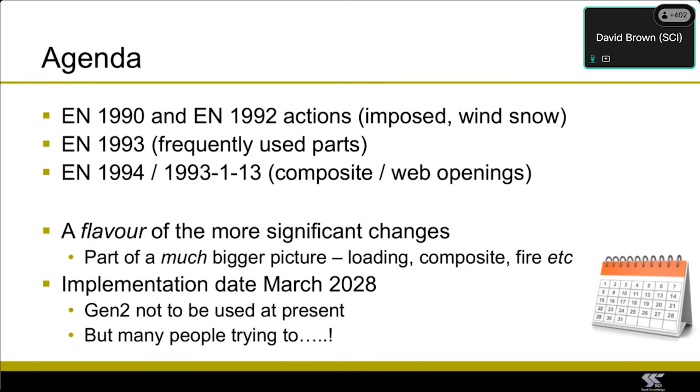In 2028 then, will people be using the Generation 2 Eurocodes? Will we change on one day from using Gen 1 to Gen 2? Well, probably not. Lots of people, certainly in the United Kingdom, remember we are governed by the building regulations. Although the building regulations currently cite the Generation 1 Eurocodes, there's no obligation to use them. So many people in the United Kingdom are still using BS 5950 and still using BS 449. The building regulations, well, they will need to be changed if they're going to cite the Generation 2 Eurocodes. And there are some questions about that, I think. So it's not entirely sure that they will be mentioned in the building regulations as of March 2028.

I want to emphasize, ladies and gentlemen, that this is a huge issue. It is a huge challenge. So many things are changing that will have a very broad impact. So in my rather limited world of the steel world, design resources, they will change. The references will change, the clauses will change, the values that you calculate will change, the procedures that you follow will change. And that means that everybody who prepares software, the software will have to be changed. And that won't be just the analysis and design of members. That will be lots of ancillary software. So the people who provide software to enable you to select a cold rolled purlin or a side rail or something like that. Many people use software to design composite beams. Well, that will all need some modification as well.

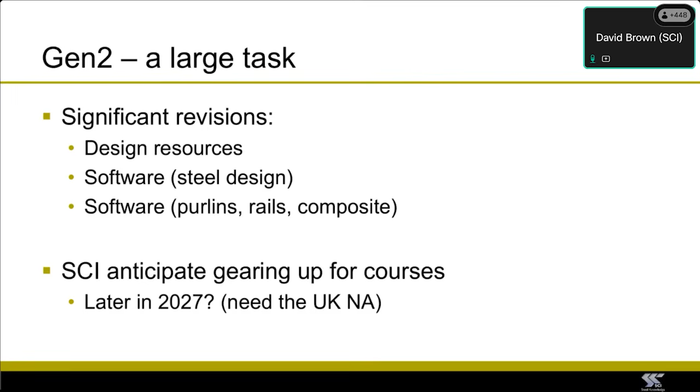So very much today is the start of a campaign, and you could imagine as we get nearer and nearer 2028, there will be a whole range of very detailed courses which the SCI will provide. So where are we 2 years in advance? Most of the Eurocode parts are complete, and very many have been published. Almost incredibly, there are now starting to be some early amendments. So even though in general the national annexes are not complete and not published, there are already some early amendments.

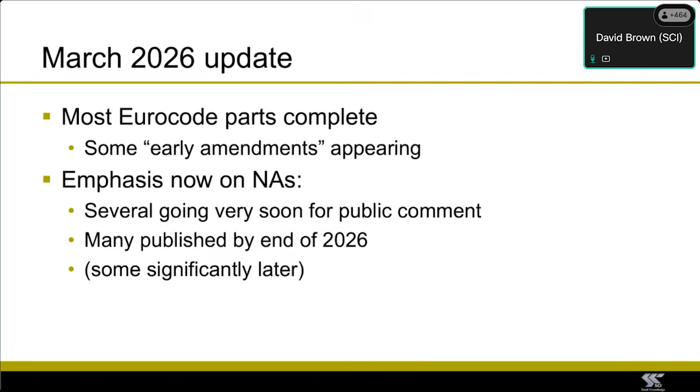The major work of completing the Eurocodes themselves is done, I would say, and now the focus is on the national annexes. So lots of people are very busy preparing the national annexes. Some have gone for public comment, you might have seen those.

Some are going for public comment, and I would expect a whole flurry of them later in the year. If we take a step back, these were the general Gen 2 ambitions. You can read those: make them easier to use, improve clarity, reduce the nationally determined parameters. So perhaps all those things have been achieved.

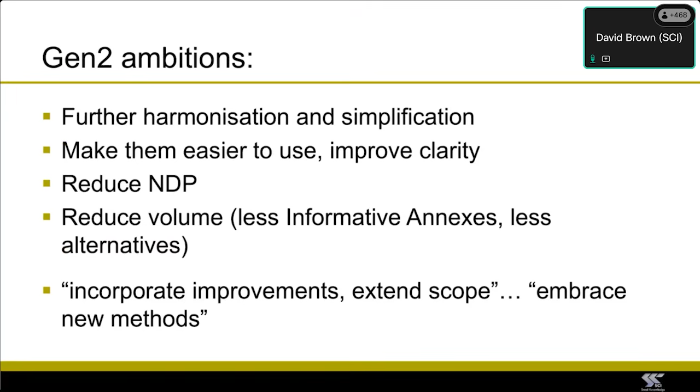I'm a little bit cynical. I'm not so sure. Because to make them shorter, I think what's happened is that some of the content has been put in annexes. So the core Eurocode might have fewer pages, but overall the page count might have in fact risen. I think many of the changes, and I will show some of these later on, are driven by academics who have spent quite a lot of time looking in detail at the application of the code clauses, and perhaps they've identified where something could be improved a little bit, or perhaps where something could be made safer if they thought it was a little bit unconservative.

So lots of people have been doing lots of research, and that means perhaps that the clauses are driven by that research. They're perhaps not as pragmatic or as simple and conservative as our history of code writing here in the United Kingdom. Lots and lots of people have been doing very many finite element analyses, looking at the results from those, and then some of the clauses you'll see are clearly curve fitting to the results. I'll show you some examples of that later on.

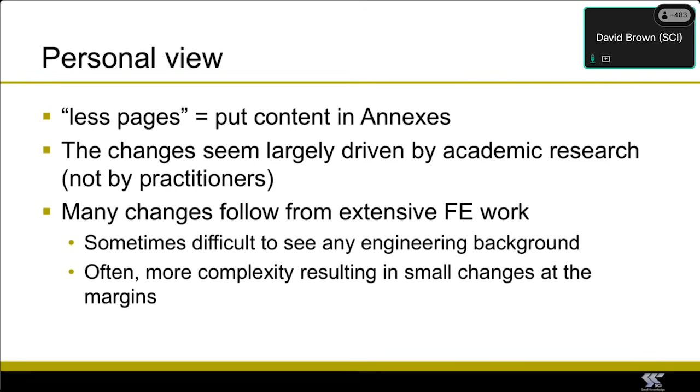We've got crazy formulas with indices or powers to 3 decimal places. It's difficult to see the mechanical background to that. Clearly they have been developed because of lots and lots of finite element analyses.

So the code clauses that I know and love, for example 6.61 and 6.62 and 6.10, 6.10a and 6.10b, well, I'll have to revise my little brain cells because they will all be renumbered. Generally there are fewer nationally determined parameters, so maybe that's good.

Some of the content that we are familiar with has been lost. One particular thing for us in the United Kingdom is that we analyze our portal frames plastically, and therefore we want to consider the stable lengths next to a plastic hinge. Well, it was decided that really that was a UK-centric interest, so that has been lost. Don't worry, ladies and gentlemen, because it will appear in due course in a revised SCI publication, because that sort of guidance is essential for us in the UK.

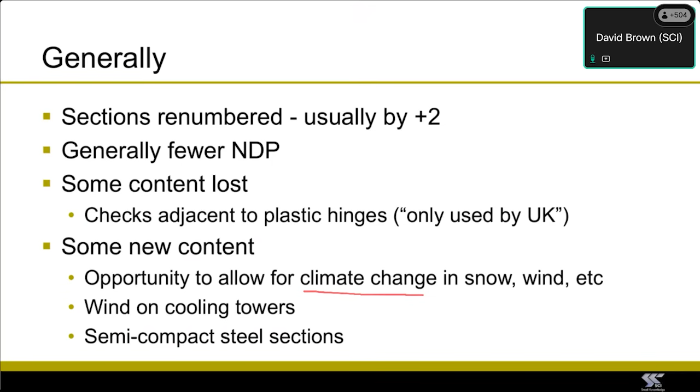I was interested to see that 1991-1-4, so that's the wind code, has got wind on cooling towers. In my experience in the United Kingdom, we've been getting rid of cooling towers, so to add that in seems a rather strange sort of feature. And finally, one uniquely to the steel world, the additional resistance that we can get by a clever trick with semi-compact sections, and I'll show you that a little bit later on.

So here is 1990. This would be where we would get our combination of design actions from.

So some modest changes. Thankfully, I'm not involved with geotechnical design because there's an awful lot of additional information in 1990 relating to geotechnics. So for people doing foundations, that will be a key Eurocode for you.

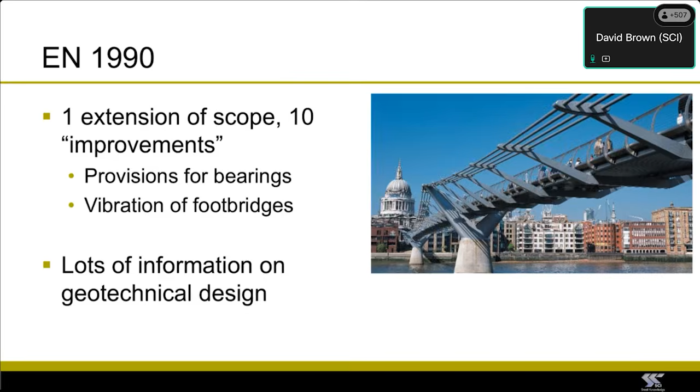The expressions I'm generally interested in are to develop the design combinations of actions. I would know those as 610, or the option of 610A and 610B, and you get a slightly better answer at lower load out of the combination of 610A and 610B. Well, those numbers have been changed, so now it's 812, and then the most onerous of two expressions in 813. So it isn't 813A and 813B anymore.

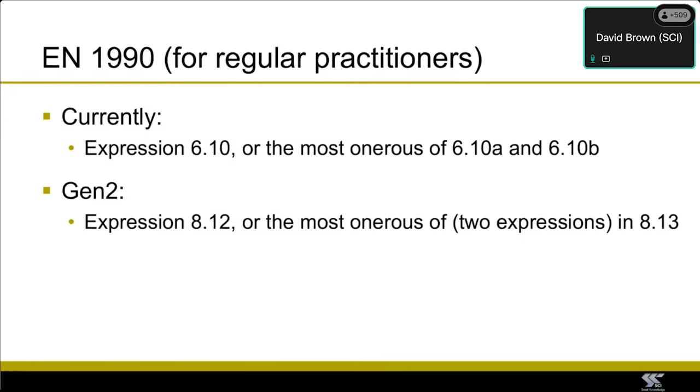It's two expressions, but they're all within 813. And to me that's become really silly, because when you refer to either one of those expressions, instead of calling them 813A and 813B, crazy in my humble opinion, they refer to the upper part of 813 and the lower part of 813. Maybe those are the rules, but to me, 813A and 813B would have been the way to go.

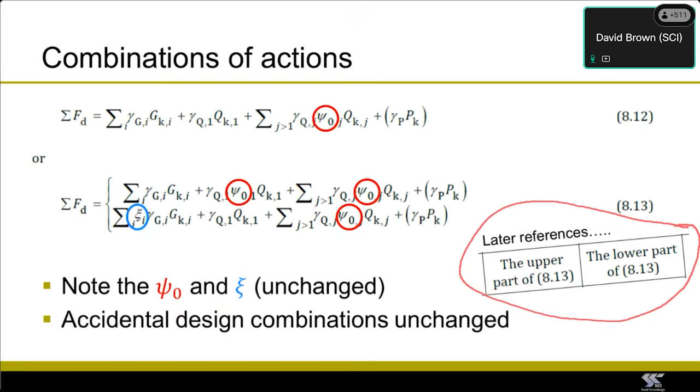As you look at the formulas, you will probably recognize that they're exactly the same as 610A and 610B, and the top one is exactly the same as 610, so no change there. And the values we will use - well, there is no United Kingdom national annex yet, but I would expect that we will take the recommended values, so the values we are familiar with: 1.35, 1.5, and 0.85.

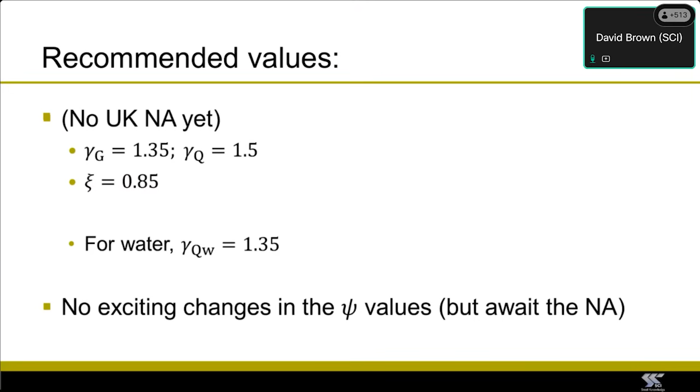There is a table of the psi values. So in the combinations we use psi 0, psi 1, and psi 2. Those remain a nationally determined parameter, and there is no national annex yet to EN 1990, so I can't comment on those. We made one or two changes in the current national annex, and therefore I would expect one or two changes in the Generation 2 national annex.

So I've moved on to 1991. We would get imposed loads on floors and on roofs from 1991-11. Another thing we used to get from EN 1991-11 was the impact loads on car park structures. Sadly, that's no longer in 1991-11. That should have been moved into 1991-17, which is all about accidental actions, you'll recall. Sadly, it's not there either.

The UK used that annex extensively, and therefore the national annex to 1991-17 is going to import what we would have known as Annex B in the current version of 1991-11. So that would be the familiar impacts on, for example, columns in car parks.

The UK National Annex is likely to have lots and lots of subdivisions for imposed floor loads, just as it does now. So we await the publication of that National Annex. There is a general observation that the appropriate floor load for a general office should be a total of 3 kilonewtons a square metre. That would include an allowance for movable partitions. So whichever way you cut it, the total should be about 3 is the recommendation. I'm not sure whether people will observe that recommendation.

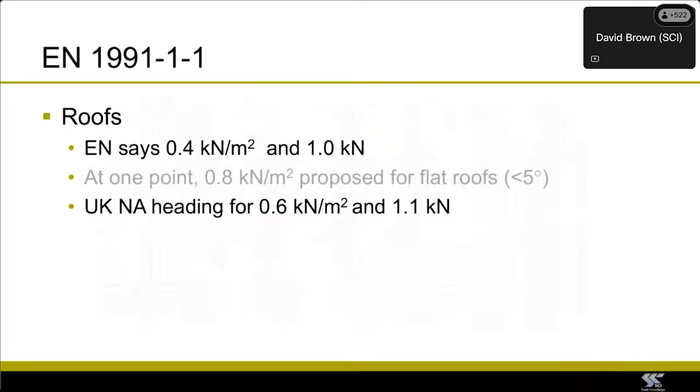This is the wind code, 1991-14, which has not been published yet, so I only have access to a preliminary version.

What I've done on this slide is look at the PDF of that preliminary version. I've made each page very small, and this particular version is coloured yellow where there is a change, just to give you an idea of the amount of change in 1991-14. It is very considerable in the core Eurocode. Those of you who know 1991-14 will know that the UK National Annex is a very substantial document and makes significant changes. I would expect that to be exactly the same with 1991-14 Gen 2.

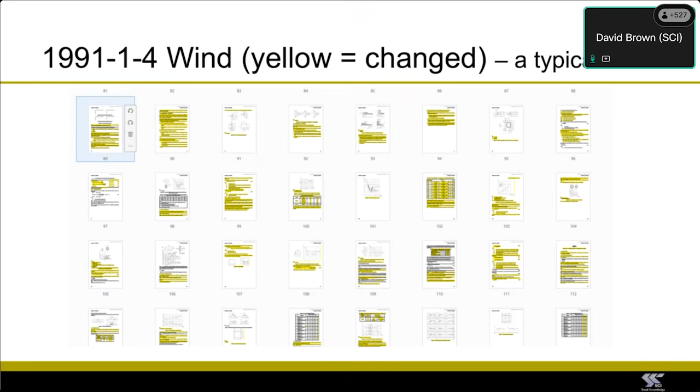So this slide is saying that the core Eurocode is changing quite a lot. I still expect the UK National Annex to have even further changes. I'm unable at this point to say anything more about the wind code, but I can say a few more things about the snow code.

So there is some drama here. We are used to a uniform snow case, and then we are used to a whole range of accidental cases: snow in a valley, snow behind a parapet, snow blowing off a tall roof onto a lower roof. In those accidental situations, we take the partial factor as 1.0.

In future, there will be no accidental actions due to snow. So the valley condition, the snow behind a parapet, and the snow blown off a high roof onto a lower roof, they will all be persistent cases, and they will attract the partial factors, for example for a variable action of 1.5. So quite significant changes in this area.

You would immediately think that will be a very onerous penalty if the valley condition and the parapet condition become a persistent load case. Well, they are relatively onerous, but the coefficients which define the depth of the drift, for example, are all reducing. So maybe it's not as bad as you first think, but it will be quite a significant change, and I think many people will say the overall load will be increasing. So you kind of lose a bit applying the 1.5 factor, and gain a bit because the coefficients are perhaps not as severe as they currently are.

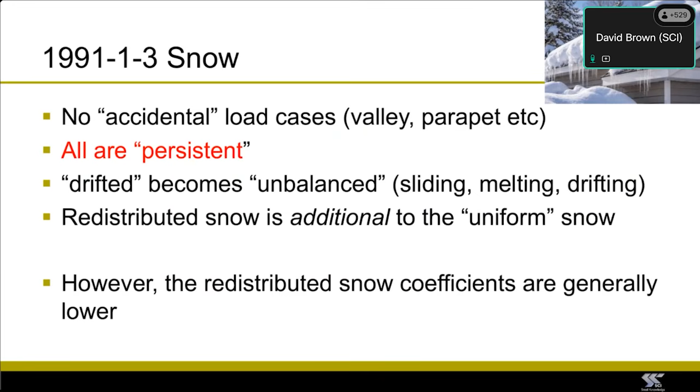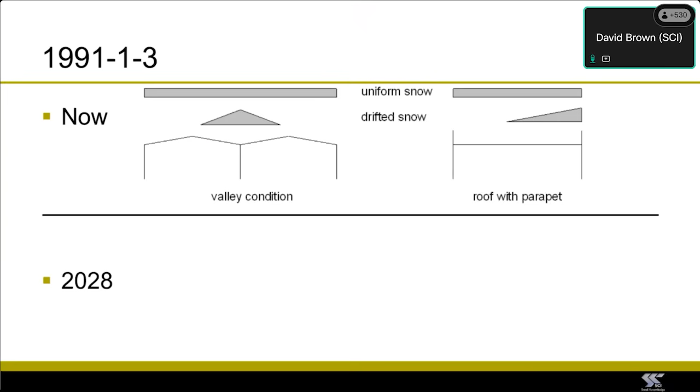So the top of this slide is what we normally do. We have a uniform case, which is a persistent case and attracts the partial factor for variable actions of 1.5. Entirely separately, we have accidental cases of snow in the valley or snow behind a parapet, using a partial factor of 1.0 because it's an accidental case. Well, in 2028, it will not be like that.

You will also notice in the drifted cases, now called redistributed cases, that the redistributed snow is additional to the uniform snow. So perhaps on the right-hand side here, what we might have imagined is a drift that's redistributed and additional to the uniform snow, and the same thing in the valley case. So probably we might be a little gloomy about those changes.

They will certainly have an impact on steelwork, and might well have an impact on secondary steelwork. The only bright note is that the value of the summation of the uniform snow and the redistributed snow in this location, or in the middle of the valley, is generally less than the accidental case we were previously aware of. So maybe it won't have such an impact on secondary steelwork, but I believe it will have an impact on the primary steelwork. We need to be careful with that.

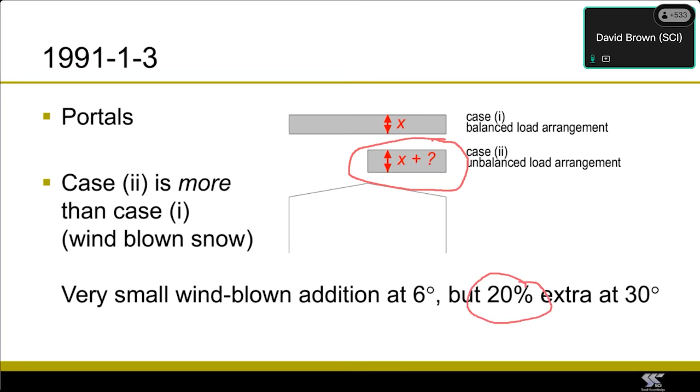But for other forms of structure, that additional snow on the one roof slope could be quite significant - 20% extra wind-blown snow at roof slopes of 30 degrees. So something to take care of.

So that was a bit of a trawl through 1990 and 1991, the interesting bits.

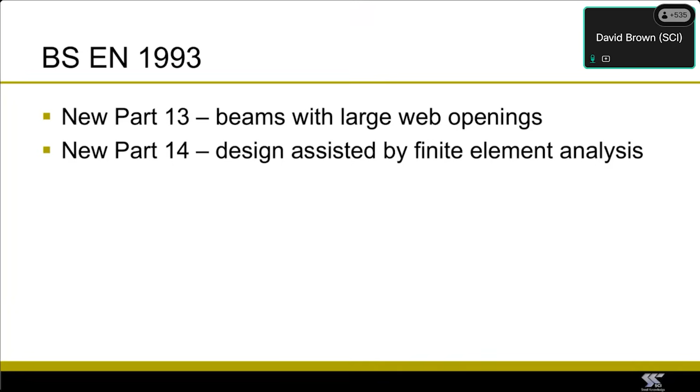Anyway, we're moving on to the Steel Code 1993. There are two new parts: beams with large web openings, which fortunately follows previous guidance the SCI has published, though with some modest changes, so software and design routines will have to change. And a brand new part, Part 14, design assisted by FE analysis. Loads of people are using FE these days, so it's probably right that there is some guidance available, and there it is in Part 14.

Gen 1 was 96 pages, Gen 2 is 120 pages. So, well, it's become larger rather than smaller.

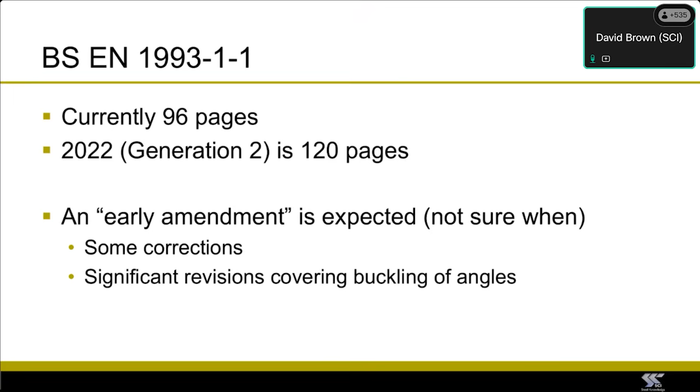It is published, it's been published for some time. We expect an early amendment. I don't believe the early amendment has yet been published, but we expect it, and we're looking forward to changes in the buckling of angles.

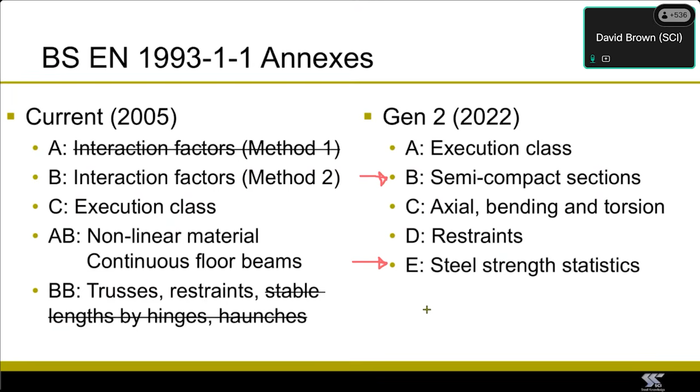And if you're very good, you would be able to calibrate your partial factors against those steel strength statistics. So that might be useful for researchers in particular.

There's a whole range of different types of analysis now in 1993-1-1. They have always been there, but they perhaps haven't been developed as much as they are in Generation 2. So if members are really chunky and therefore imperfections don't have any significant impact, and if frames are really stiff and second order effects in frames don't have any second order impact, well, we don't then have to worry about imperfections, and we don't have to worry about second order effects. It seems a bit stupid to say that, but that's the truth.

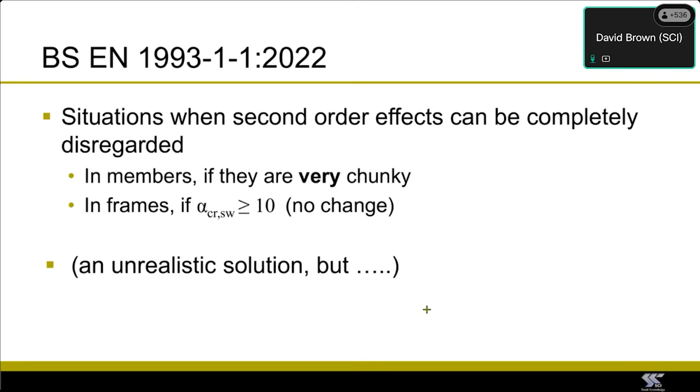If we did have something where we didn't need to worry about imperfections and didn't need to worry about second order effects, I think it would be an entirely unrealistic solution. It would be very, very large members for the sorts of loads that we're trying to carry.

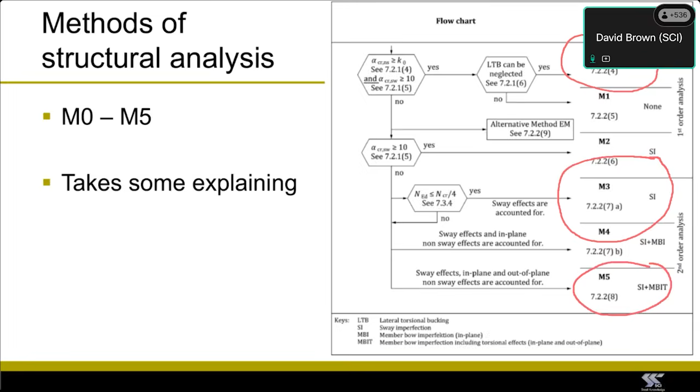Yes, we have to concern ourselves with imperfections, and yes, we have to allow for second order effects in our analyses. And somewhere down at the bottom, if we allow for absolutely everything in the analysis - imperfections and second order effects - well then all we need to do after that is check the cross section. So that will be one extreme.

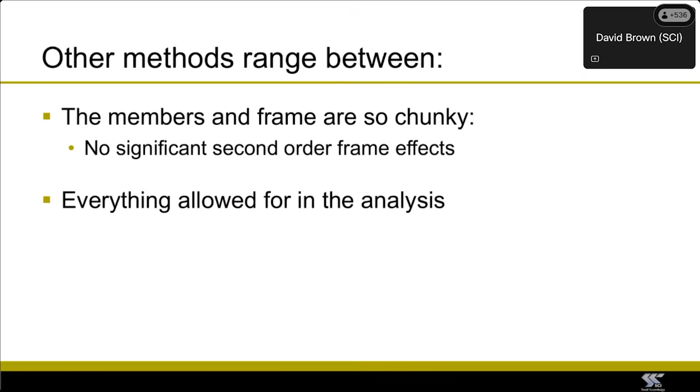Members are so chunky and so stiff that we don't need to worry about second order effects and imperfections. And at the other end of the extreme, we would allow for everything within the analysis, and then all we need to do is a cross-sectional check. So probably I suspect that we will remain generally where we are normally.

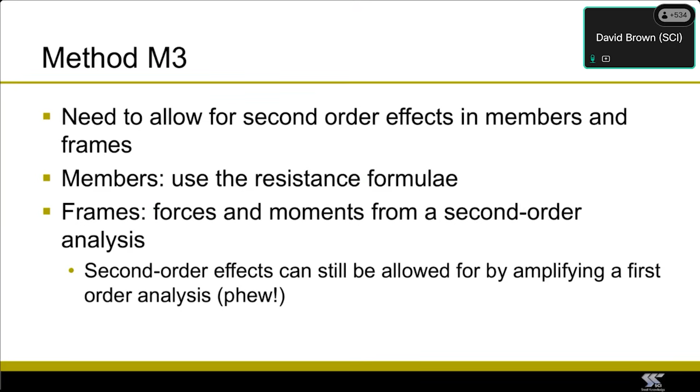We will relax about member imperfections because we know that they're allowed for in the code clauses. They always have been and they always will be. And for frames, we will check frame stability and calculate alpha, currently known as alpha crit, and if necessary do an amplifier. The alternative is that we do a second order analysis of the frames. So really no change, but I think that flowchart will cause a lot of confusion when people get to it.

If you're a researcher, instead of relaxing and knowing that imperfections are covered in the resistance formulas, you could model your members with initial imperfections. I don't know why anybody would want to do that unless you are a researcher, but here you can, and here we have some new values. I share a twinge of amusement that somebody has spent a lot of time and worked out very precise values, 1/68, not 1/70 or 1/65, but 1/68. So somebody somewhere will be very proud of their work in calculating 1/68.

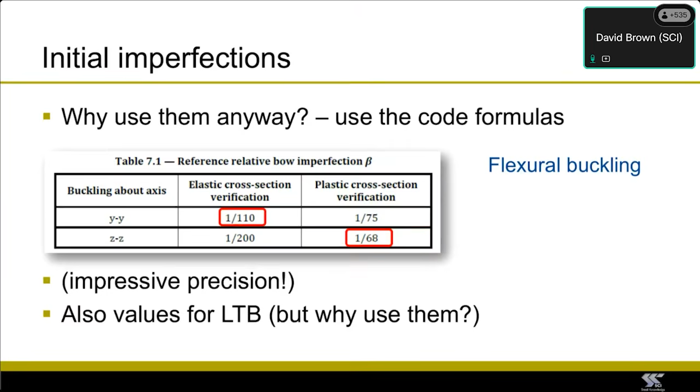This is classification. The areas highlighted are where classification changes have been made, and these changes are always more conservative. In some cases, when you classify a member to the Generation 2 Eurocodes, it's in a higher class. It might have been class 2, and now you might find it in class 3. Of course, that's a worse situation in terms of resistance, because as you go from class 1 to 2 to 3 to 4, the resistance is diminishing.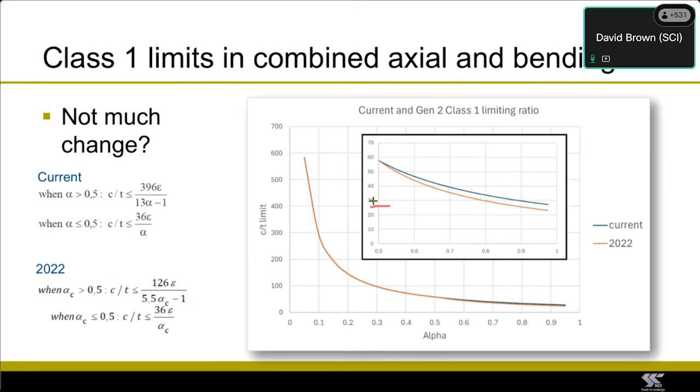I am being a bit cynical here with this graph. These are the classification limits plotted for when you change from class 1 to class 2. I'm being cynical because at this scale on the right-hand side of the curve, you can't really see any difference. If you enlarge that right-hand side from alpha greater than 0.5, you would see a small difference there. But remember, you're reading across to this value on the left-hand side, so it might now be 28, and maybe the value before was 30 or something - a little bit of change in that sort of area.

This is the class 3 limit, and again I'm plotting the entirety there - psi value on the bottom scale from -1 to +1. You can see the Generation 2 curve, which is dotted, has a very slightly different curve. And again, it makes you wonder, well, was it worthwhile? Did it make so much difference? Are we so clear about the modeling of our loads, and so clear about the modeling of our structure, that we really believe the bending moments, shears, and axials are precisely correct, sufficient that this change makes sense?

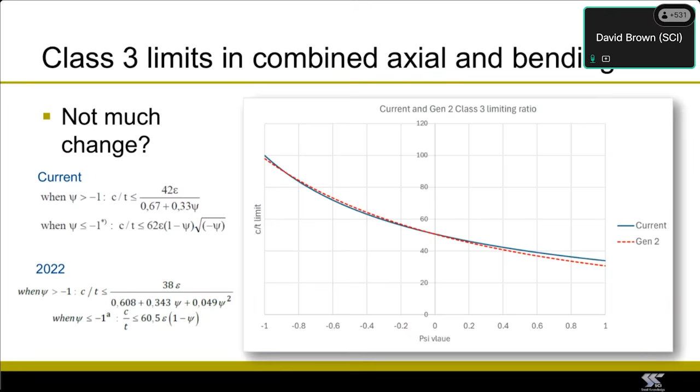Sometimes I think we need to remember that we're just modeling the loads. We don't really know what the loads look like - we model them as UDLs or point loads, but they're not really like that. And our frame analysis, well, again, that's a model of reality. Rather profound, really, for a Wednesday, but here we go.

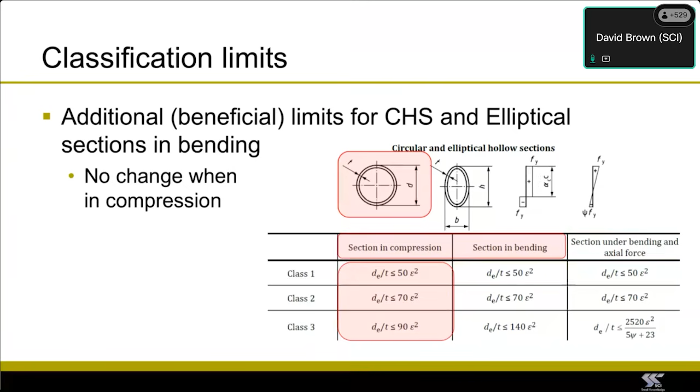Now, this is an introduction to the work which has gone into Annex B with semi-compact sections. This is a moment rotation curve - moment on the box... no, rubbish.

Moment on the vertical axis and rotation on the horizontal axis. This is how beams behave.

Class 1, we get past the plastic moment of resistance because of strain hardening, and we can rotate it a long way. Class 2, we equally get past the plastic moment of resistance, but we can't rotate it very far. Class 3, we're less than class 2, and therefore we generally limit ourselves to the elastic moment of resistance.

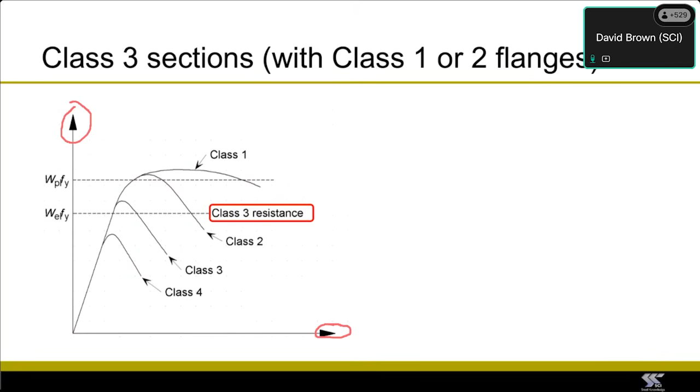But as that class 3 curve shows, we fall somewhere between the elastic moment of resistance and the plastic moment of resistance. The Eurocode gives a procedure to work out that resistance, using an effective plastic modulus, WEP.

The generation 2 formula is on the bottom left-hand side. We start with the plastic modulus and subtract a proportion, that's beta, of the difference. The difference is the plastic modulus minus the elastic modulus - that's what we've got to play with - and we subtract a proportion of it.

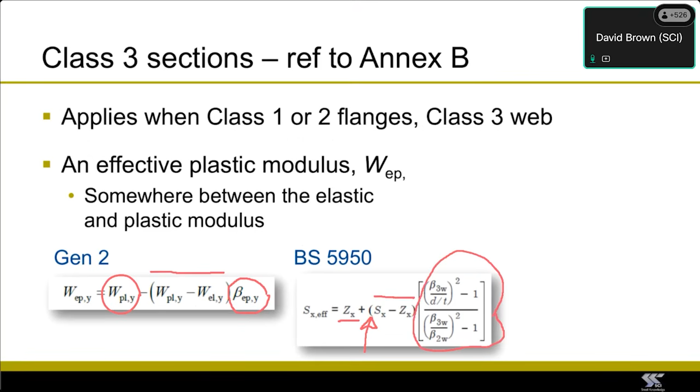In BS 5950, which has been around since 1985, we started with the elastic modulus and added some part of the difference between the plastic and the elastic. This is really the ratio, presented on the left-hand side as beta - it's to do with the classification limits and how close you were to them. So it's the same thing really, and it's just made it in slightly revised form into generation 2 of the Eurocodes.

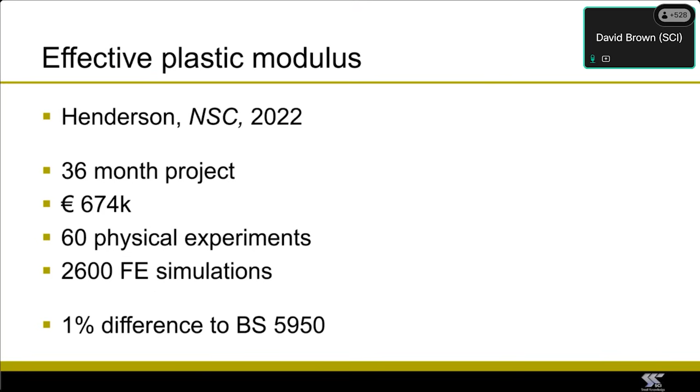My good friend Richard Henderson wrote about this back in 2022 - we've been opening up these Eurocodes for a long time now. He identified that developing the guidance in the generation 2 Eurocodes took 3 years and a whole load of euros, and you get a 1% difference from had you done it the way set out in BS 5950. So it might have been more cost effective just to take the BS 5950 rules and import them directly into the Eurocode.

I'm a little bit sad about this change. This is the table where we identify which buckling curve we use for flexural buckling, so we'd use this for columns. For the last few years, I've been exhorting people to use S460 for columns.

Not only is it stronger, but you get a very healthy improvement in the buckling curve. Well, in generation 2, it remains stronger, of course, because it's S460, but the advantage of the buckling curve is not so pronounced, which is disappointing really. We were saving money, we were saving carbon, and now in generation 2, it won't be quite as advantageous to select S460.

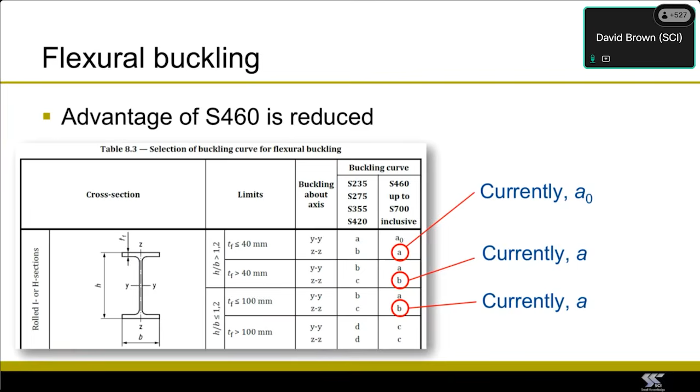My favorite subject, which is a bit sad to say, is lateral torsional buckling. The lateral torsional buckling rules in the Eurocode are changing. There are, in fact, 3 ways of doing it.

There is a very simple case where you just identify the compression flange and treat it as a strut. There is the general case, which the Gen 2 Eurocode says you can use for UB and UC. And there is a special case - you would really rather hope that the special case gives an improved resistance.

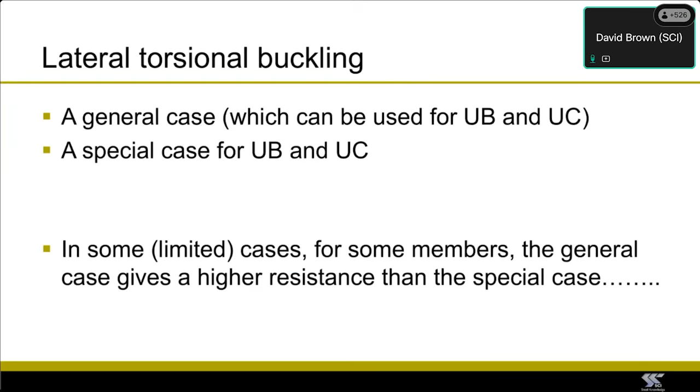You're putting more work in, so you would expect it would give an improved resistance. Sadly, that's not always the case. You can find situations, limited I agree, where in fact the general case gives a better resistance, a higher resistance than the special case. So you can imagine us here at the SCI when we prepare the blue book to generation 2 - not only do we have to consider the special case, we also have to consider the general case, because sometimes the general case gives an improved resistance.

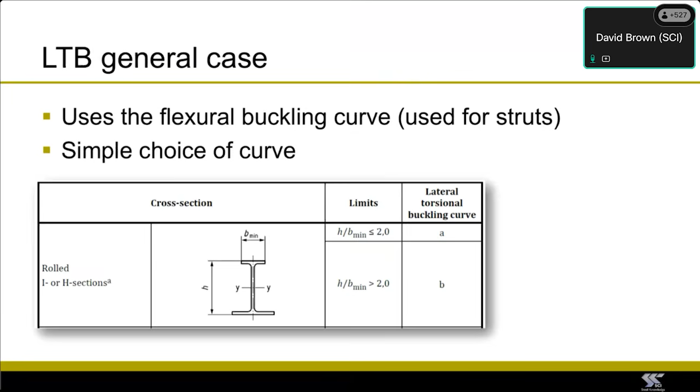So here is the general case. It's a very easy selection of buckling curve, curve A or curve B, just based on the H/B ratio for the particular member. Once we've done that, we use the column buckling curve - notice that we use the column buckling curve, but just substitute into it the lateral torsional buckling terms. So that's dead straightforward, dead easy.

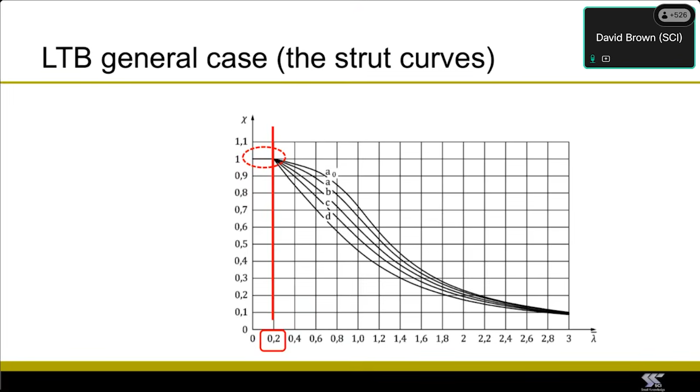That's what that value is when it appears in the formula. All very good, but the Eurocode says for lateral torsional buckling, there is no reduction if the slenderness is up to 0.4.

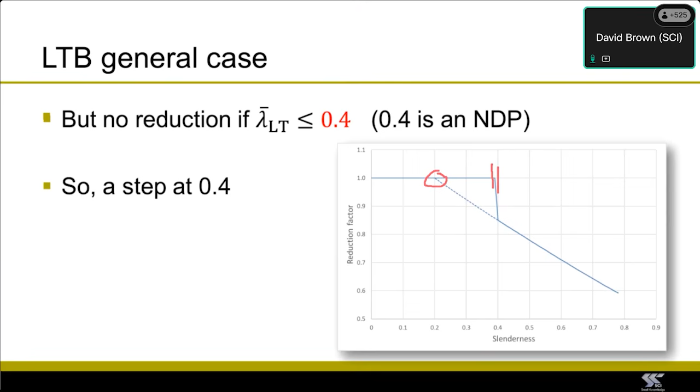So we're going to get some discontinuities, aren't we? Just below 0.4 and just at 0.4. That will be interesting, and I think people will have questions about it.

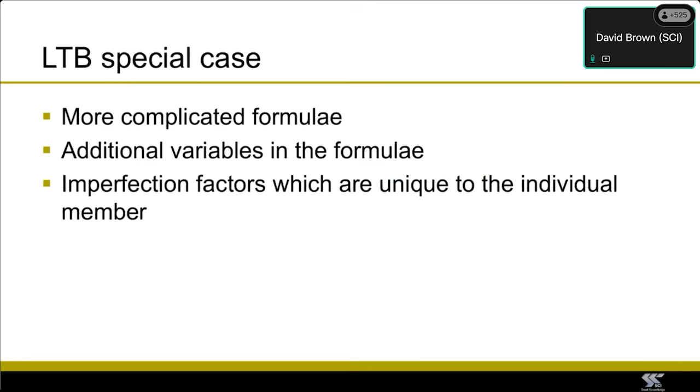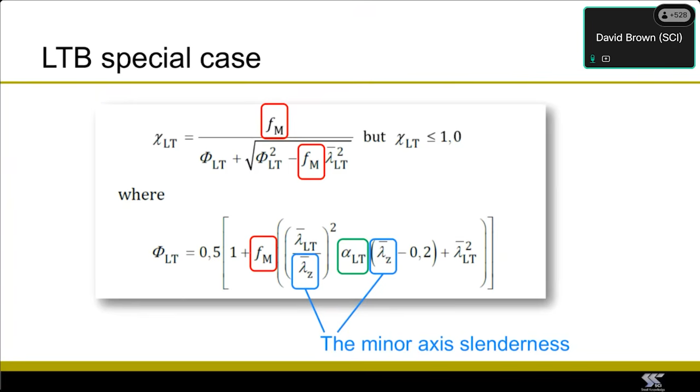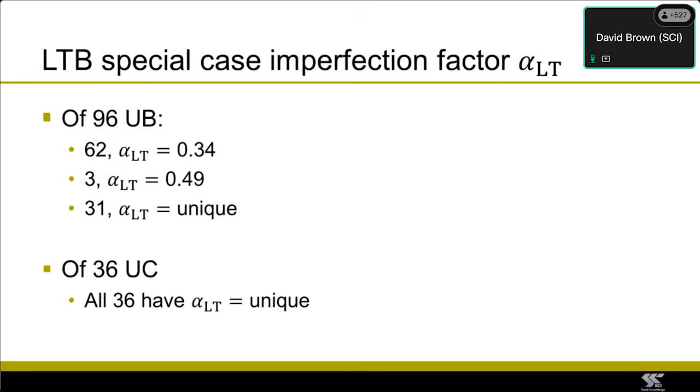So no longer a consistent set of standard curves—it will be a unique relationship if you are not affected by the limit. So of our universal beams, just over 60 are impacted by the limit, so they're okay, I suppose. Another 30 will have a unique value of alpha LT. All of our universal columns will have a unique value of alpha LT.

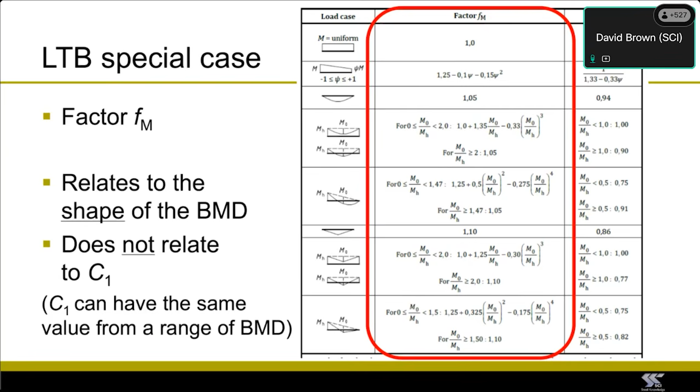And then the FM factor, which you would have seen a couple of slides ago—this is my example of curve fitting. You'll see here we've got ratios to the power of 3, the power of 2, and the power of 4. Definitely curve fitting, for a limited shape of bending moment diagrams. I would have loved it if the value of FM was related to C1, because both C1 and FM are associated with the shape of the bending moment diagram. Unfortunately, there is no relationship between the value of FM and C1, which causes us problems when we get to the blue book.

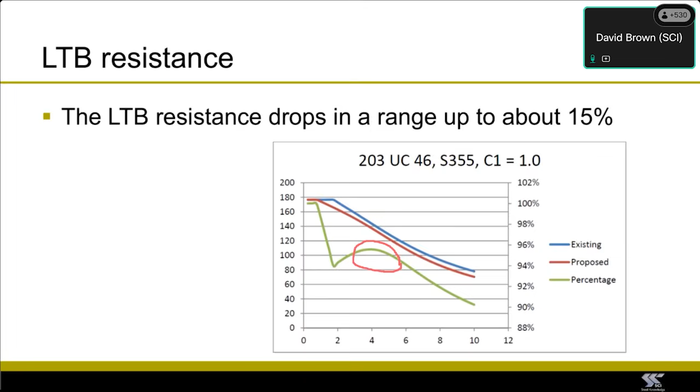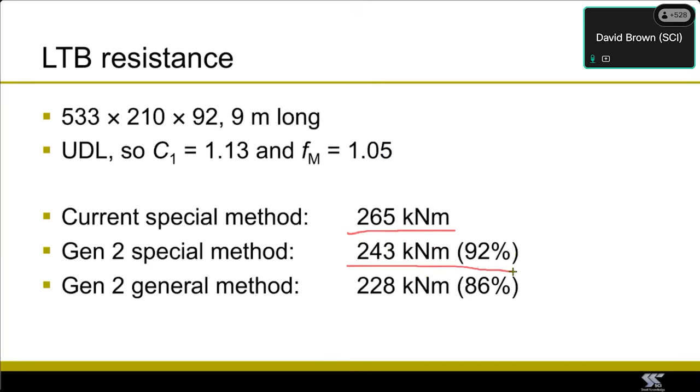Here's a real version—we always like 533-210, so this is 92 kilograms per meter. You can see that the special method currently gives us 265. Well, the Gen 2 method will give us 92%, so we've lost 8%, and that, I guess, would be a typical member.

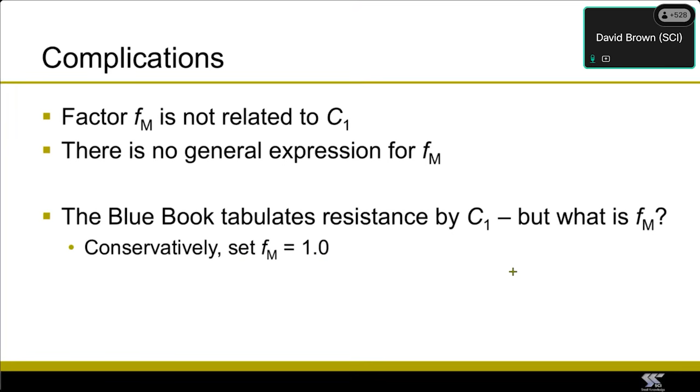So yeah, we've got problems when we come to the blue book, because our blue book is presented against values of C1, but there is no relationship between C1 and FM. So the only game in town is to set FM to be 1. Well, that will be very painful for the areas where we do actually know what C1 is and we do actually know what FM is for certain shapes of bending moment diagram.

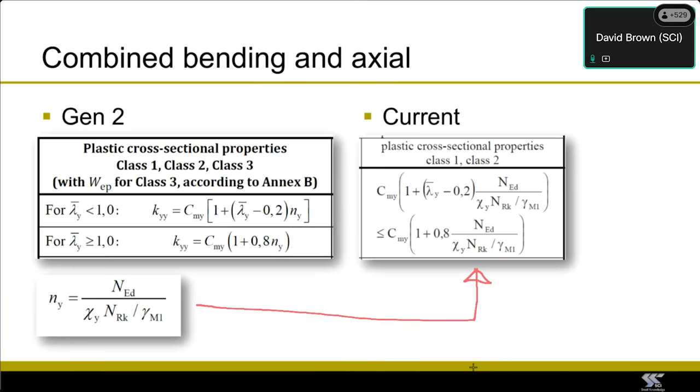Axial load and bending, we would have known these as 661 and 662, so no significant change there. The interaction coefficients are presented in the same way. Now we've got this fella here, NY, and you think, well, what is NY? Well, strangely, NY is exactly what it always was. So we've made it simpler by just rearranging that and extracting the value of NY.

Good news here. It's confirmed that if we only have major axis bending and compression, then we can simplify these expressions. It gives us advice on the coefficients that we can use here. That's good news, it's just practical, because when you look at these coefficients, for example the one which I've highlighted again in the bottom line there, that's always about 0.98 or 0.97. So really to say it's 1, we're kind of okay. And over here on the right-hand side, that's just the conservative value. So if we take a conservative route, that's what the Eurocode is telling us we can do.

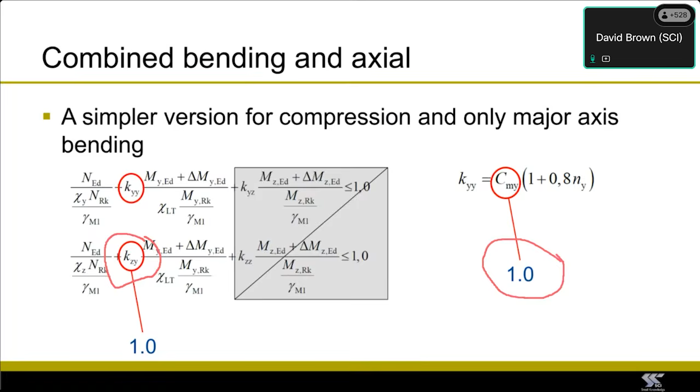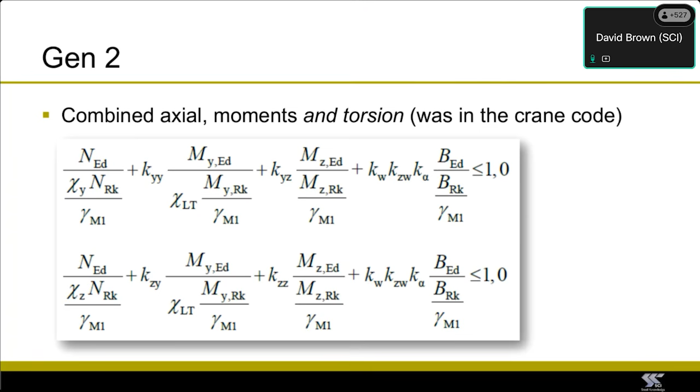Maybe this is good news. This is when we've got torsion involved as well. So we've got axial, major axis moment, minor axis moment, and torsion. That used to be in 1993 Part 6 for cranes, and now that's been imported into 1993 1.1.

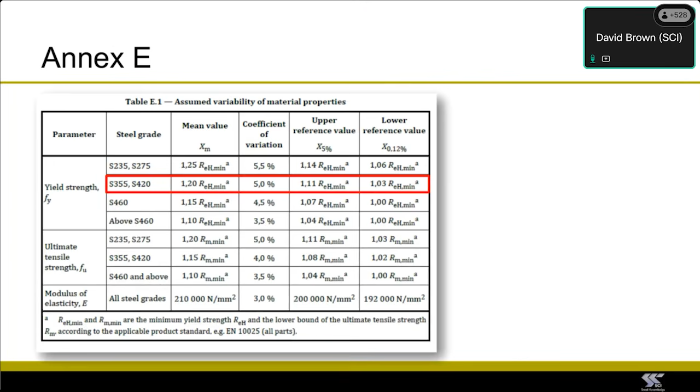This is Annex E, and it's telling us about the production statistics. So it's telling us what the mean is, and it's also telling us what various standard deviation values below the mean are. This is normal sort of statistical stuff. You take the mean, you remove a number of standard deviations below the mean, and you can determine the characteristic value or the design value. And effectively, that's what's been done to calibrate reliability. Researchers, I think, would be very interested in those statistics.

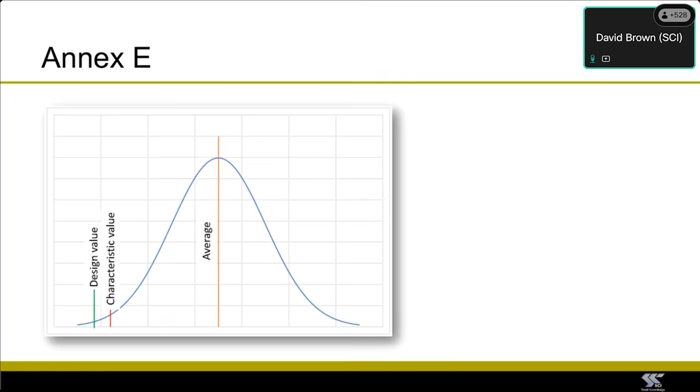Some things have gone - Annex A, that's not a sad thing. I've mentioned that before because I don't think we used it in the United Kingdom. The stable lengths next to plastic hinges, this is the third time I've mentioned that. Sad deletion, but it will be resurrected in an SCI guide, so probably that's okay.

Now, another good thing is in the area of brittle fracture. So you will perhaps have been on an SCI course before, and you'll know that brittle fracture in the Eurocode is really related to fatigue, and the SCI produced a different guide where there was no fatigue. So you could use those values if you were building a building where we wouldn't normally have fatigue as a design consideration. Well, the Eurocode sort of recognizes that because it now has two core tables.

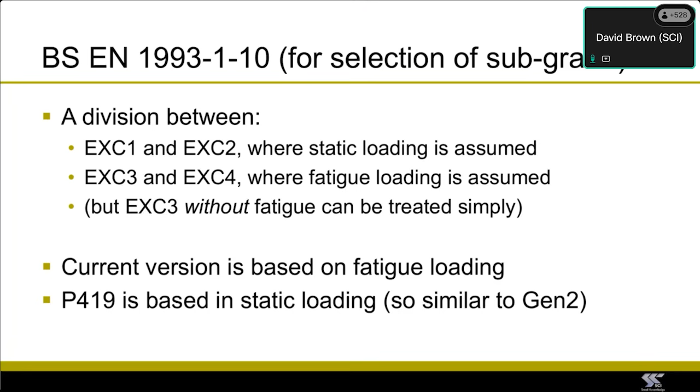Unfortunately, it has tables for execution class 1 and execution class 2, where really that is no fatigue. And then it has a different table for execution class 3 and 4, where really that is fatigue. So it's a bit of a shame, really, that it refers to execution classes when really what it's doing, one includes the effect of fatigue and one excludes the effect of fatigue. And maybe that will be clarified later on, and maybe that will be clarified in the UK National Annex.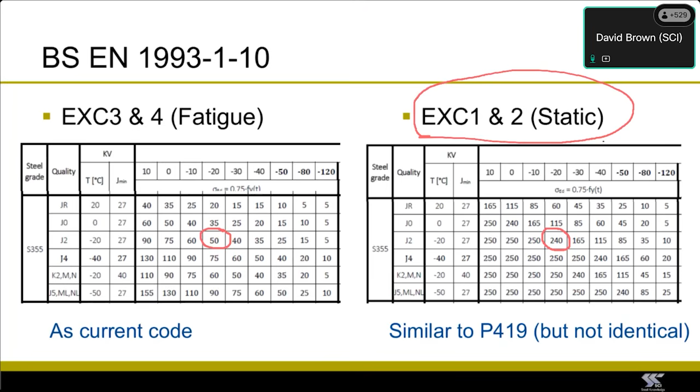We currently have a large national annex to the Gen 1 version of this. I expect that we will have a very large annex to the Gen 2 as well. So other than saying what I expect, I don't know anything of the detail. We wait to see, so no further comments really on that area.

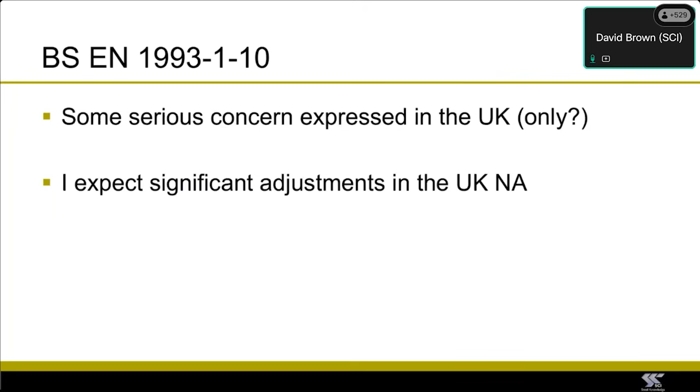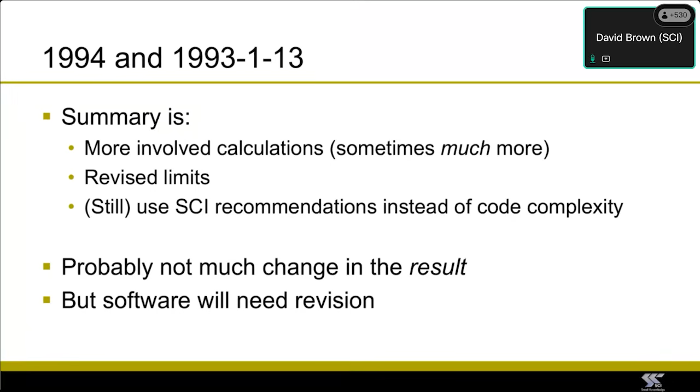1994, that's composite - I thought I'd better put a word in about that. And 1993-1-13, they're sort of associated because lots of people do composite beams with holes in them. There are some changes, but thankfully most of it is exactly the same as you'd find in the SCI guide, mainly because my colleague Professor Mark Lawson was the convener of the Eurocode working group as well as the author of the SCI guide. So maybe we'd expect that to happen.

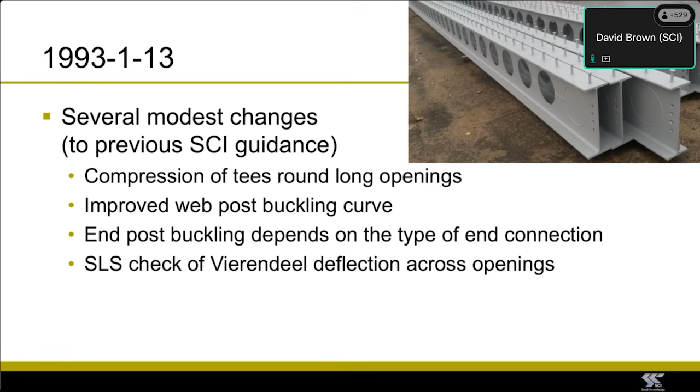1994, really composite - not my area, but there are a few changes. Some of the changes appear to involve a lot more calculations, but they don't have any particular impact. These are a list of the changes around 1993-1-13, so beams with web openings. Some additional things there, but as I say, not much change from the SCI publication.

Joints then - give you a few highlights out of joints. The code has been revised in terms of its layout, so lots of components are now found in the annex rather than in the core part of the Eurocode.

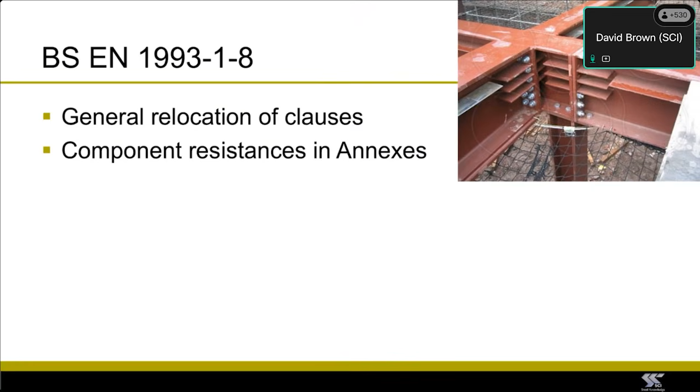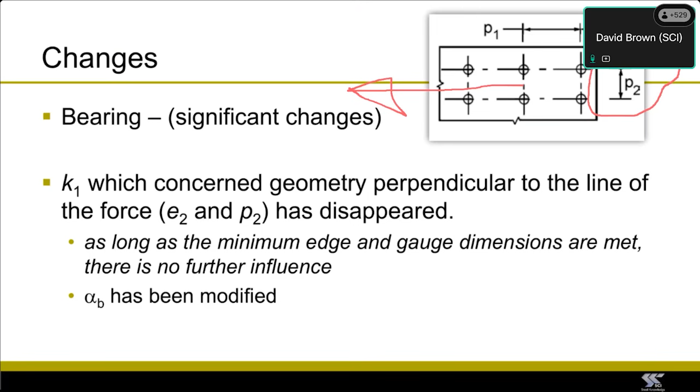A bit of drama is in the bearing, the calculation of bearing resistance. Looking at the diagram on the top right-hand side, the formulation of the bearing resistance clauses is no longer interested in E2 and P2. The line of action of the force I've now drawn on. So E2 would have been the edge distance, and P2 I would have known as gauge.

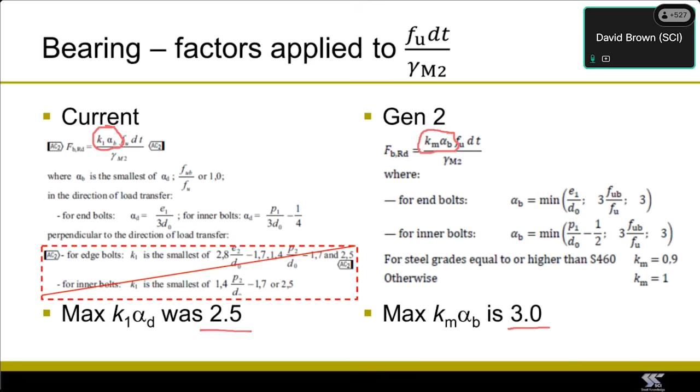I don't want you to necessarily appreciate the detail here, but those two variables, those two dimensions, no longer appear in the formulas. If we look at the formulation of the resistance calculations, I'm interested in the value I've highlighted - what it was and what it is - because everything else is the same: the ultimate strength, the diameter, the thickness divided by gamma M2. I'm only interested in the product of those two factors highlighted in the two expressions. In Gen 1, the maximum product of those two values could have been 2.5. In Gen 2, it's 3.0. So that's telling you the bearing resistance is potentially rising considerably.

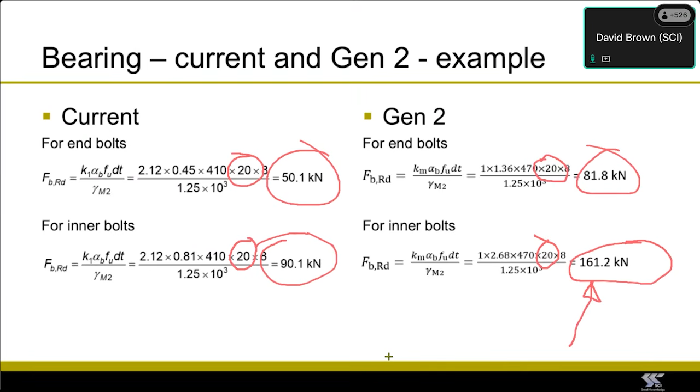Again, I don't particularly need you to look at the values, but compare the 50 to the 81, compare the 90 to the 161. Now in most cases it's sort of irrelevant, because if you're sharp-eyed you'll recognize this is for M20 bolts, and the shear resistance of an M20 bolt is 94 kilonewtons. So yeah, I know probably people would say you could have a bolt in double shear and take advantage of that increased bearing resistance, but for many connections it will not be much help.

Here's something I'm particularly twitchy about, and other people in the United Kingdom are as well - this is the depth of a drilled and tapped, drilled and threaded hole into material, the depth you'd need to achieve the full tensile resistance of the bolt. I don't like this, because a normal bolt is very high strength, typically 1,000 newtons per square millimeter. Here we've got depths of engagement for plate - for example S355 plate, which has an ultimate strength of 470 newtons per square millimeter. So the ultimate strength is about half, but we still don't seem to need very much depth in plate. For an M20, 8.8, in S355, the factor here is 1.11 times the bolt diameter. So to me, not a very deep threaded hole, but the material is substantially weaker.

So there are some tests going on now to try and verify whether this table is correct, and maybe that will be changed in the UK National Annex.

Some people use cold formed square hollow sections or rectangular hollow sections, and there is a limitation on welding around the corners of those sections, which you currently find in 1993-1-8. People might rejoice, because when you open up 1993-1-8 the Generation 2 version does not have that requirement in it, and you might think: great, I can weld merrily around the corners of cold formed square and rectangular hollow sections.

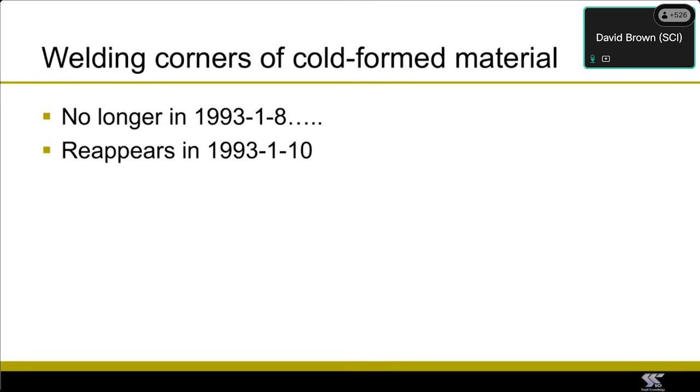Sadly not. That requirement has been imported directly into 1993-1-10, so it still appears, it's just in a different place.

Some good news again, which I like. I know that the web panel is often the weak link in a joint, and lots of people use a supplementary web plate, and I'm always a bit questionable about these welds here, welded into the root radius. They're very large and they're painful to do, and access is not straightforward.

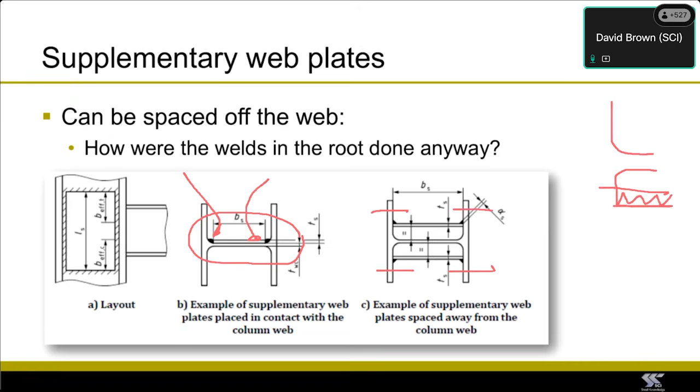Well, now the Eurocode says that you can put your supplementary web plates a little way away from the web. So in my personal opinion, that's the web and that's the root radius. It would be great to put the supplementary web plate just here, just stepped back from the root radius. And then there would be sufficient room to get bolts into the flange. So I think that's a good idea, and that's a helpful detail, and I hope people start to use it.

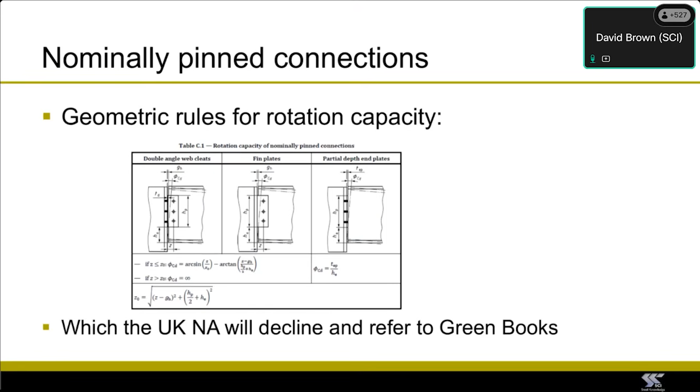There is an annex in 1993-1-8 which provides information on rotational ductility, if you like. Where do connections get their rotation from, and how do you measure it, and is there sufficient? The UK have been producing the green books, which have been used satisfactorily for decades, and we will decline, I think, to use the annex in the Eurocode, and we will, as we do in Gen 1, refer to the green books. So, here's a bit of plus and minus.

I know this has been a whistle-stop tour, ladies and gentlemen. It was never intended to be anything in great detail. It was always intended to just give you a flavour of what's coming your way, and probably, if I'm being honest, make you a twitch nervous, because I think the changes are considerable, and many of the things which you use, your resources, your software, etc., are going to need to change. And if you're a consultant working in multi-materials, of course, you have a much larger problem than just steel.

But here's my personal view. Is it an advantage that we've got increased precision? Well, I've got a question about that. I think the fact that there are now 2 tables in the subgrade part, so 1993-1-10, is a good thing. We wait with anticipation to see what changes the UK National Annex will make.

We've now got a plastic modulus for Class 3 sections. Well, that won't apply to many sections, so it's not so much of an advantage. And of course, BS 5950 had it for, what, 40 years or more?

Guidance on web openings is good. That wasn't part of the Eurocode before. It was just in an SCI publication, so that's good. And I genuinely think that guidance on FE is starting to become very common. That's a good thing. On the right-hand side, these are my concerns.

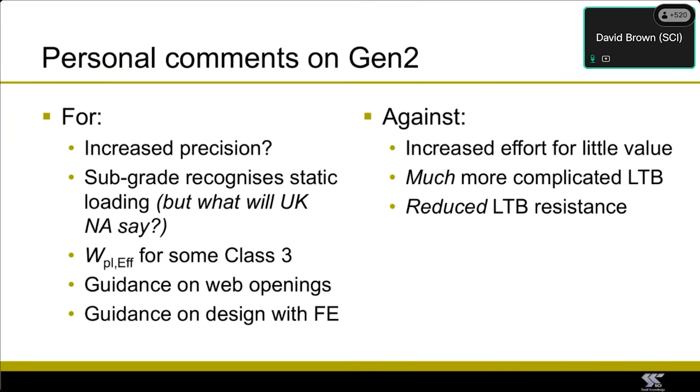Right, 2 more slides to finish off, and they're important, ladies and gentlemen, so please hang on and then I'll have a look at the questions.

What's going to happen as far as the SCI is concerned is you can imagine we will start to be preparing and rolling out detailed courses. So there's an awful lot of topics which I've covered in this one hour. You could imagine that there will be courses on various of those individual topics. We are also in the early days of updating some of our guides. More of that in 2 slides' time. Okay, so that's generally what will happen, and I suggest that you keep your eye on the website and you'll start to see more and more Gen 2 stuff coming out of the SCI.

In the short term, these are the things that are happening. We've got some courses on light steel framing and disproportionate collapse in April and May, respectively. The next webinar is, in fact, me again. Sorry about that, ladies and gentlemen. On the 22nd of April, that will be for members only. And that's to do with single-story steel frames in boundary conditions. So you'll probably know that things are changing there. And I'll go through the background and talk about some of the implications.

The next free-for-all webinar is to do with 1991-1-4 wind loads and some software which we've developed, Cypher or Zephyr, I think you say that, and that's on the 29th of April. Now, before I look at the questions, one final slide.